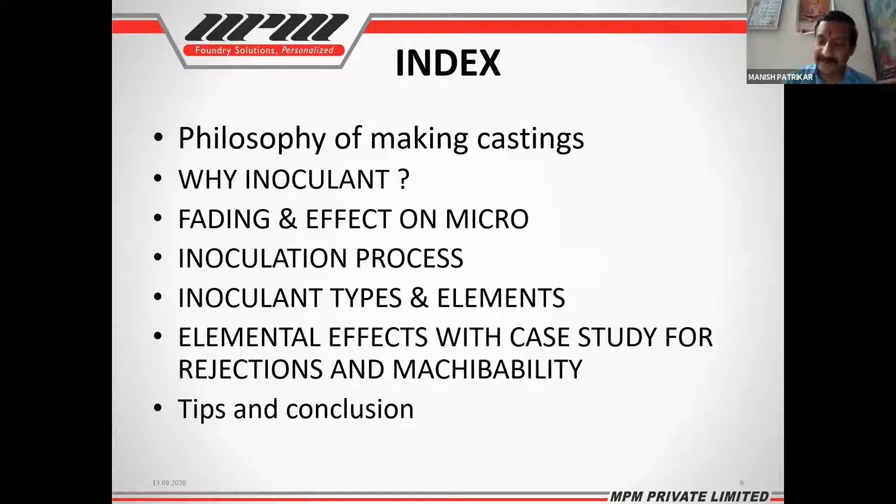Starting with the presentation, as I initiated a move from 2007 about the zero rejection concept in foundry, I would like to say a few words with a few slides on zero rejection again, because that's the philosophy of making castings. Then I will move to the core topic. I will not take more than 10 minutes - I will be 100% within the time limit.

So the question is, when do you have zero rejection in foundry? Sandeep, the answer is with you. When all the things are as per your specification, or whatever process you have defined, if you follow it, you will be almost near to zero rejection. Fantastic answer - again a very good technical answer, and again not the simple one. The best answer for this is: when the foundry is closed, you have zero rejection.

So we will go to the philosophy of making casting. What is the philosophy? Whenever, if you believe, 98% of casting defects occur when the metal is molten. We all know when metal is molten, then only defects occur.

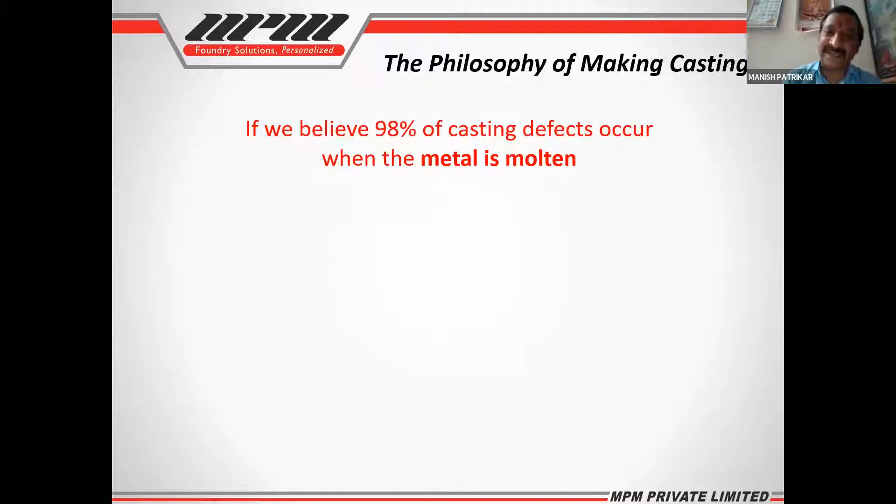So in an ideal world of a perfect mold and perfect melting, if our pouring time is zero, if ingate velocity is zero, if solidification time is zero, then there is no time for defects. This is the philosophy of making casting, which is what Sandeep was trying to say in normal words. I have said this from the metallurgical point of view in technical terms. You can imagine if pouring time is zero, ingate velocity is zero, solidification time is zero, there is no time for defects.

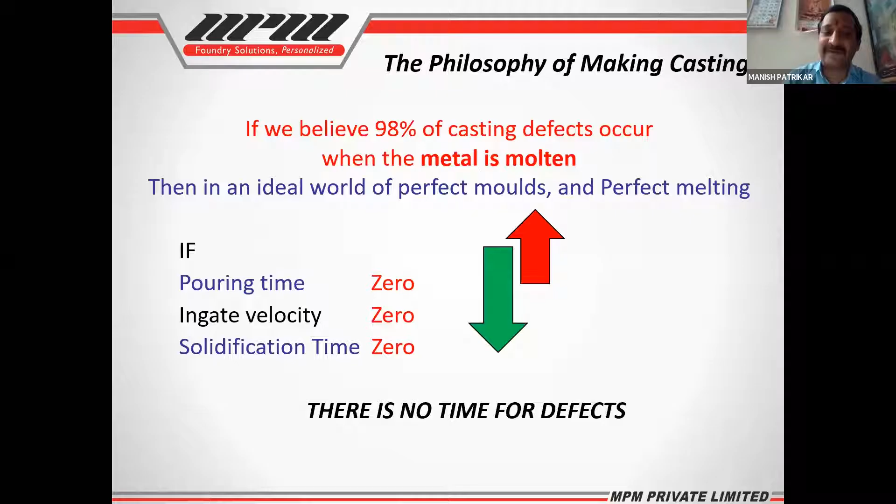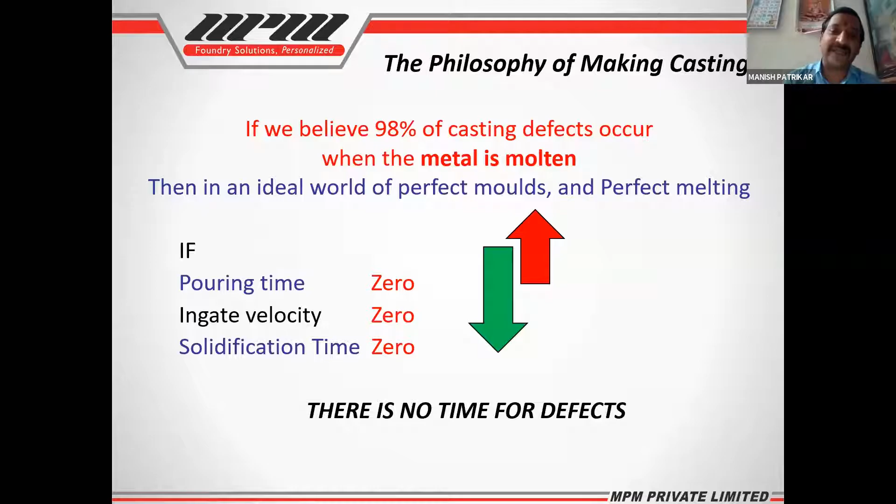So what does that mean? It means it is giving you a direction. Whenever you are going in the green direction, whenever your pouring time is less, whenever your ingate velocity is less, whenever your solidification time is less, that gives you no time for defects. It means it will give you fewer defects. If you move opposite to that direction, shown here by the red arrow, that is where you will move towards defects.

So this is the philosophy of making casting, right? In short, whenever we are going towards zero defects, if you use less of everything, like I said in the previous slide, you are moving towards a zero defect concept. This is a philosophy of making casting which I have been promoting right from 2007. That's why I shared these two minutes with this slide.

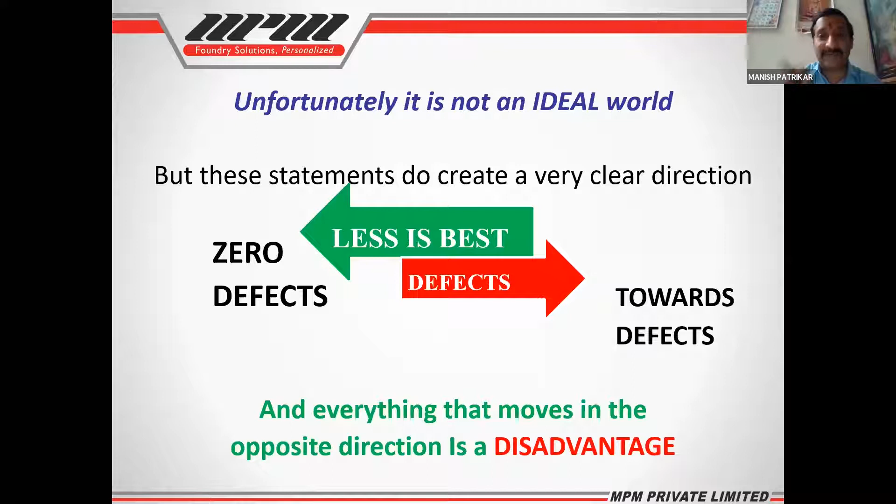Now we are going further into the detailed topic. Coming to inoculation, I urge all foundrymen, whenever they look at inoculation or inoculant as something which will do magic, please remove this from your mind. Using special inoculants like cerium, bismuth, strontium, or zirconium is not the answer to all your issues. It is the last solution.

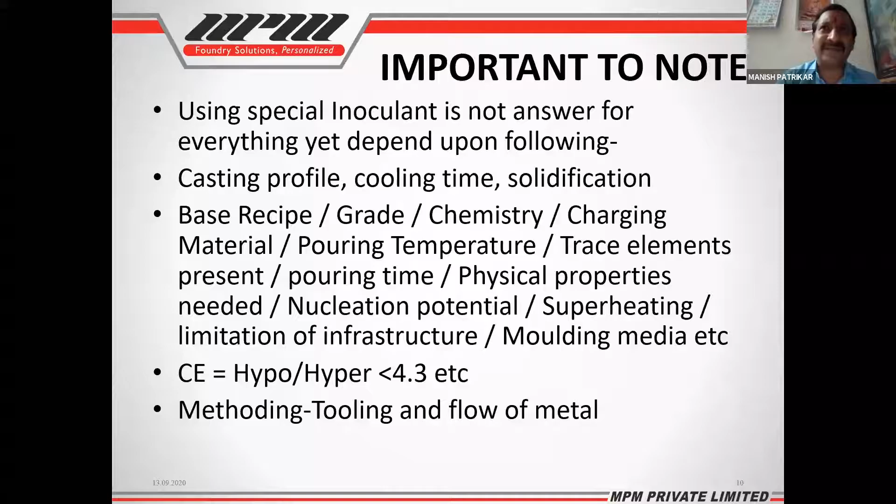If you have a macro shrinkage, believe me, 99% of the time inoculant will not work. If you have a micro shrinkage, very very minute, due to fading or some similar issue, then yes, that's an answer. So what exactly is inoculant?

If you see the first, second, and third images, these are wedge chill tests. In the first, there is no inoculation. The second is with 0.25% ferrosilicon, the third with 0.125% strontium. So these show the elemental effect. I have not used anybody's product here because this is a technical forum, so I am trying to show the elemental effect.

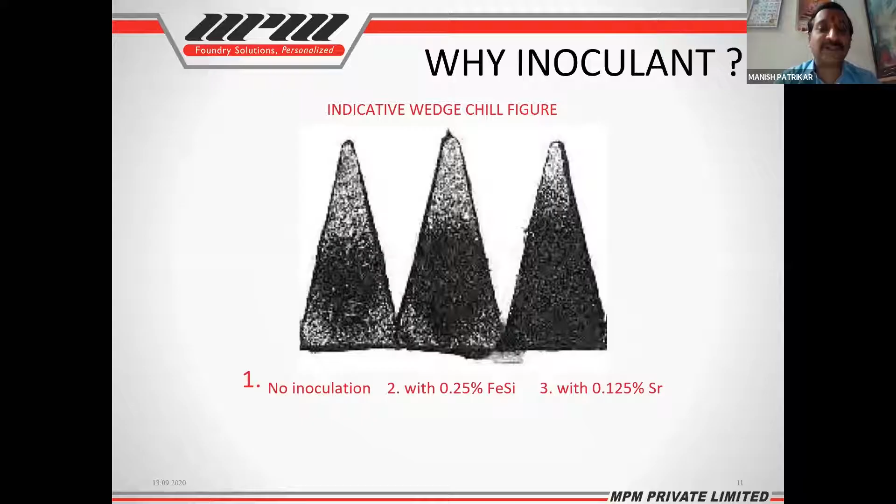In the first slide, you always have a higher chilling tendency. In the second, because of using ferrosilicon, you have a lower chilling tendency. And in the third chill, you can see because of using the strontium-based inoculant, you have a much lower chilling tendency.

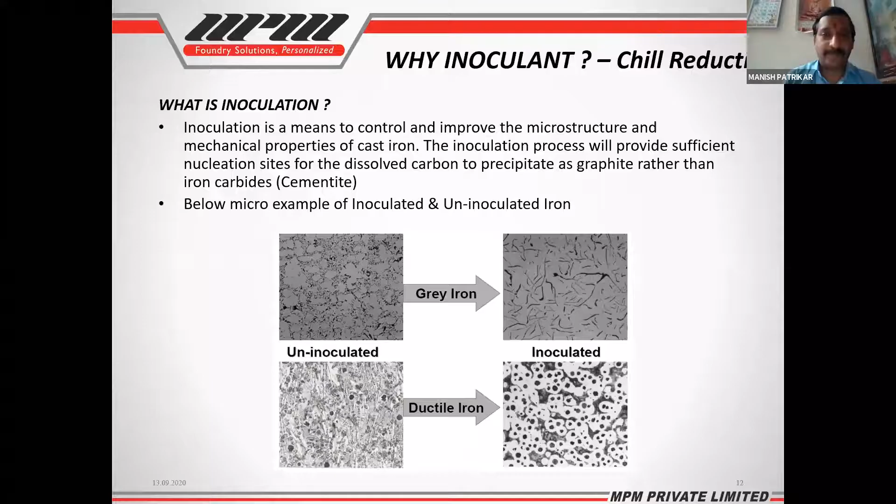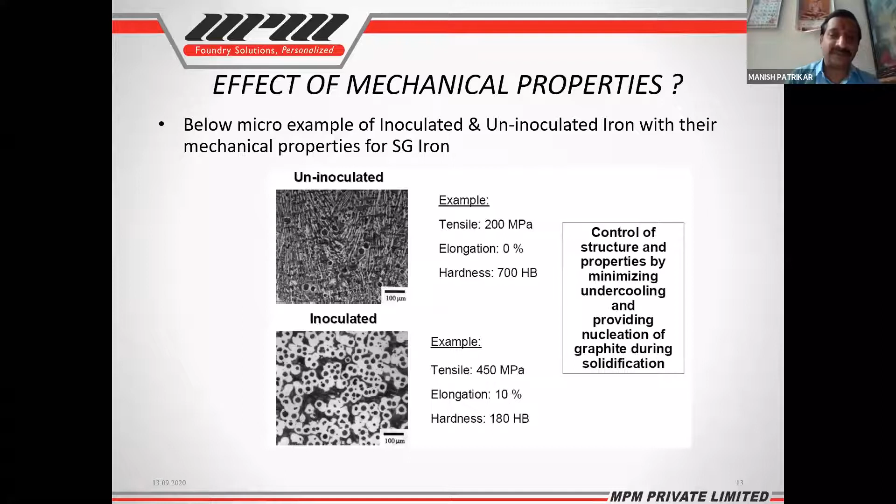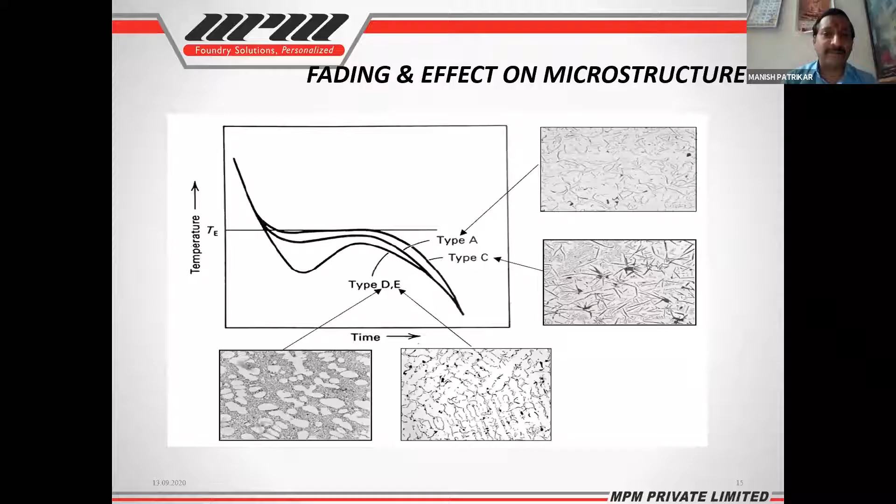Then this is a fading effect on the microstructure. What exactly is type A, type C, type D, and E? Mr. Gaikwad has already covered this in his earlier slides, so I will not spend much time on these. This is what he has already shared.

First is ladle transfer, second is ladle pouring, and third is mold stream inoculation. This is a normal practice. I would suggest everyone establish their own numbers, but whenever somebody mentions ladle grade inoculants, the

ladle grade inoculants range from 0.5 to 2mm, 1 to 3mm, 2 to 6mm. So there are always questions people ask, what ladle is best? What sizes are best for the ladle? This is in general.

Everybody has to set their own parameters, because no foundry is similar, even if producing identical components. For ladles greater than 50 kg and less than 300 kg, we can use 1 to 3mm and 0.5 to 2mm inoculants. For ladles greater than 300 kg, 2 to 6mm, and for greater than 1 ton, 2 ton, 4 to 8, 8 to 12mm sizes are recommended.

For mold stream inoculation, 0.2 to 0.7 is advisable, and for in-mold inoculation there are inserts available for bigger castings. But usually for pouring, where pouring machines and auto pour systems are used, 0.2 to 0.7mm is the normal recommended size.

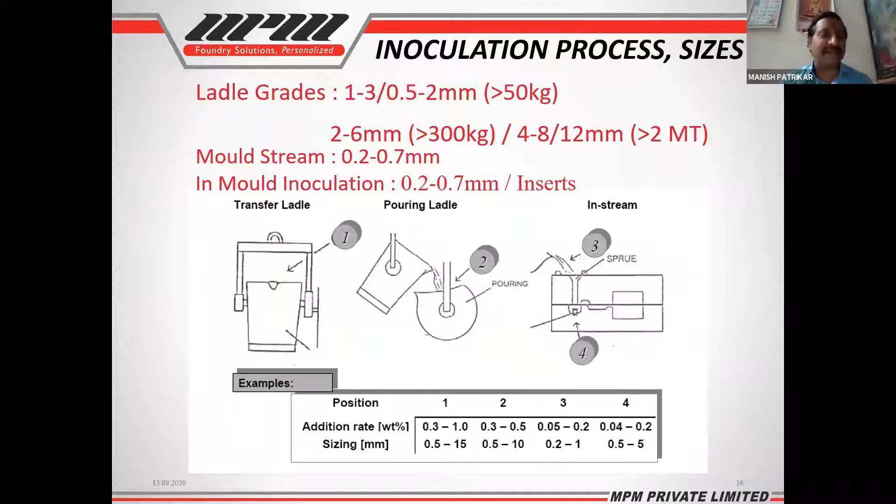What are the inoculant types and elements? There are two types of inoculants - I'm telling you from the manufacturing perspective, not elemental. One is cast and the other is mixed. However, nowadays mixed inoculant is outdated.

So most inoculants that exist today are cast inoculants, and they are classified by potency. There are low potent inoculant, medium potent inoculant, and high potent inoculant. The potency is actually the intensity of the element.

Low potent is ferrosilicon with calcium and aluminum - actually all inoculants have ferrosilicon with calcium and aluminum. Medium potent is barium-based inoculant. High potent is strontium, zirconium, cerium, bismuth, lanthanum, antimony, because these are very specific and very strong inoculants where you need a specific purpose to use them. Otherwise, even an extra dose of these inoculants will give you a defect.

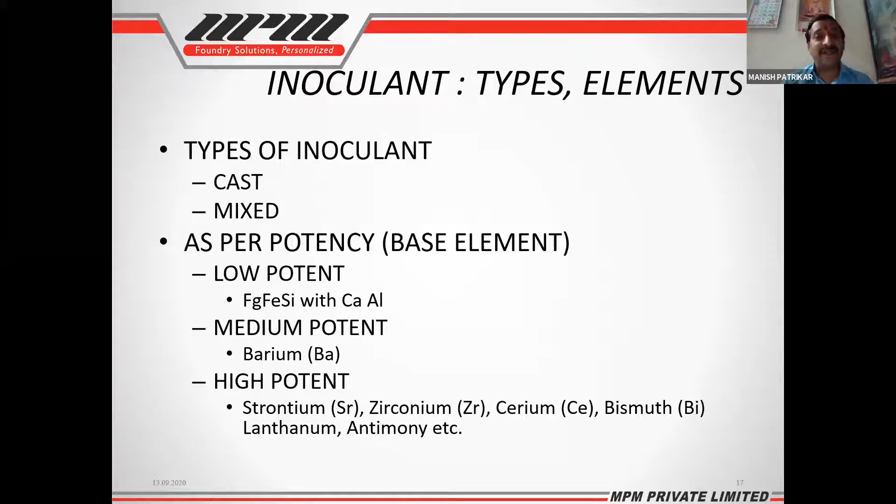So these are something which we are trying to conclude the effects of the element. If you can see the fifth number, barium-containing FeSi has the highest fading tendency. This is a chart where you can decide what exactly you want for the element and what the effect will be. On the left-hand side you can see nodules per mm square, and on the x-axis you

can see the time after inoculation for the inoculation after pouring. So this fifth number has the maximum time, up to 20 minutes, which is a high barium inoculant. Say for example, if I take barium - so it has an initial, say for example, 7th. So 7th is strontium.

The initial effect will be highest, but it will start fading after the 10th minute. Even for bismuth, if you look - there is no bismuth in this chart, it is in the next slide. So if you see the 2 to 6 minutes, these are the minutes where you will have very high initial graphite precipitation, and then it will start slowly fading. So barium has the highest fading tendency as per the number 5 chart.

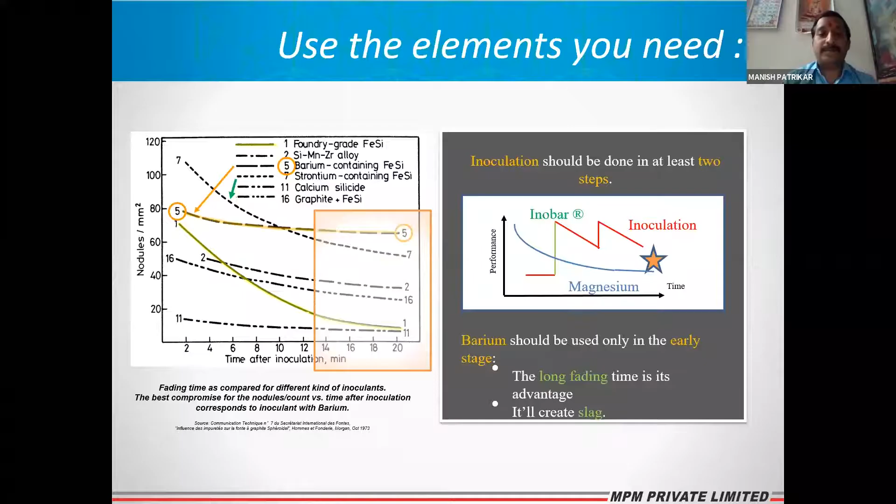So if we see specifically barium, it's a fade resistant inoculant. It is mainly used in gray and ductile iron commonly. It's used at heavy section thickness also with a high pouring time, positive effect on slag formation in ductile iron, effective inoculant for alloy irons such as Ni-resist, especially effective as a preconditioner or as a first step inoculation.

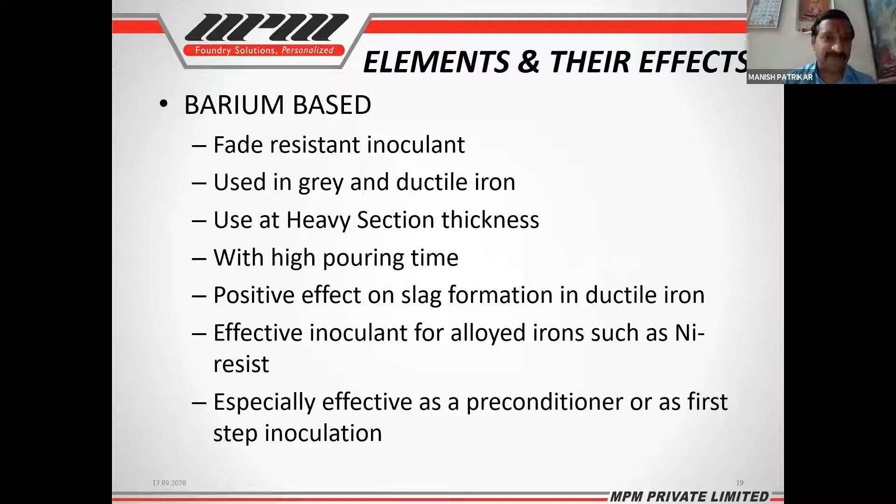So this is the elements and their effects we are starting with. Now I am taking strontium. Generally, it is admitted that strontium inoculants are supposed to be best for gray iron, even though strontium inoculants are also being used for SGI. It's a myth in India that strontium inoculants are only used for gray iron. No, strontium inoculants are also used for SGI.

For your information, most of the foundries producing piston rings, which have only 1 or 2 section thicknesses, are also using strontium based inoculant for SGI. So it is not that strontium is only used for gray iron, it is also effective for SGI.

This gives maximum chill reduction. It promotes less shrinkage than other inoculants. It reduces the chilling tendency, and it also improves the microstructure.

Here is a casting which I am showing. We took a study with this casting where, in the fin region, they were having D-type graphite formation and were using barium based inoculant. But with use of strontium based inoculant, the shrinkage tendency and machinability improved, which also helped improve the machining.

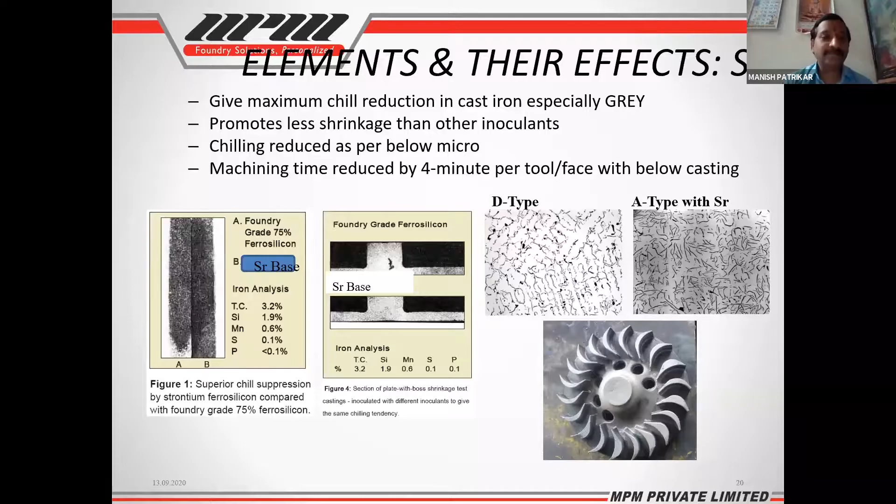Strontium plus zirconium - I'm trying to show this from a case study perspective. This is the RA housing where earlier they had C-type defect in the microstructure, which improved with the help of strontium and zirconium.

This is also a similar defect where they had C-type and open grain structure after machining, as you can see on the left. But while using strontium zirconium inoculant, we were able to eliminate this defect.

Again, I would like to declare here, it is not a ready-made solution. It's not that just by using inoculant, everything gets solved. You also need to work on gating, risering, fading, chemistry, molding media, and solidification. It's not magic that you drop the inoculant and things will go right. No.

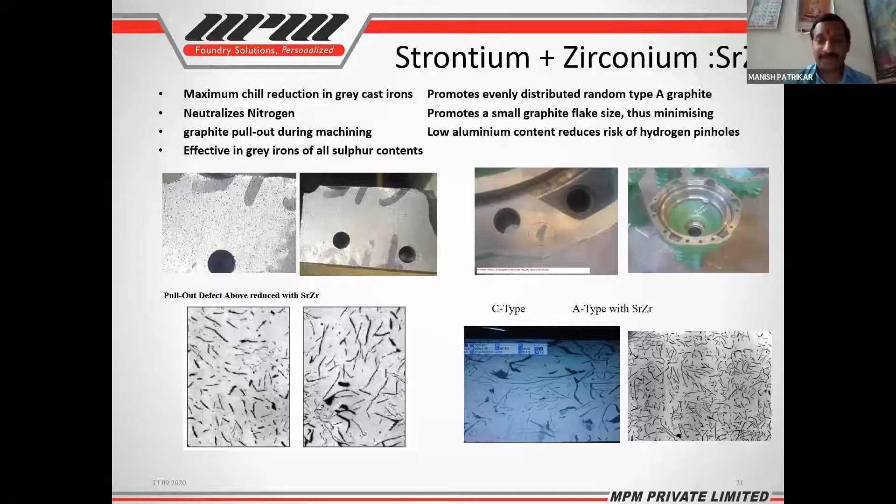Cerium - we are using this as a high potent inoculant. Cerium, like in gray iron, is supposed to have better inoculation. Cerium or RE based inoculants are supposed to be better for SG iron because they are actually used to reduce the shrinkage defect, just like a strontium effect in gray iron. For SG iron, cerium does the same thing and also helps reduce the tramp element.

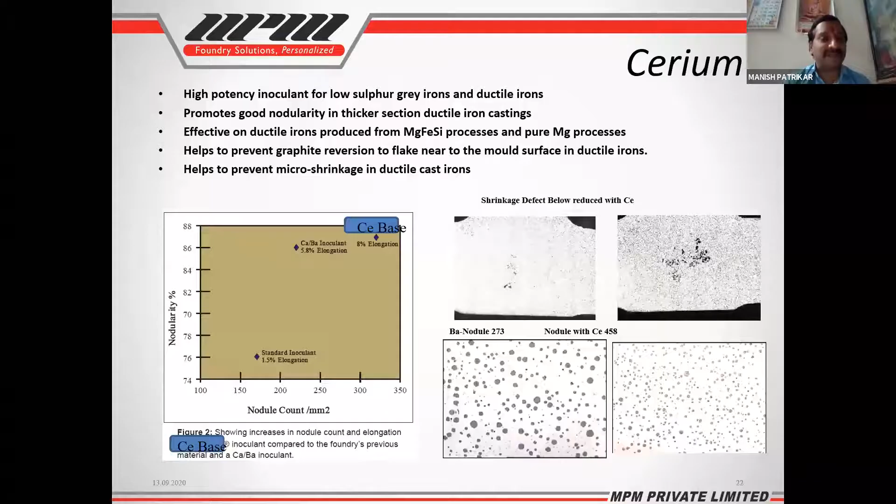Sandeep, I hope I am in time. Yes, you continue, there is no such time limit. You can continue. No, no, but I just wanted to finish in 10 minutes, whatever my time. No problem, given, no problem.

So, bismuth and RE over cerium. There is a myth in India that bismuth inoculants promote an elemental effect and a cumulative effect in the casting as a residual element, which later builds up and gives a defect. No - if you are using direct bismuth as a metal, then there are chances of buildup of bismuth metal or bismuth element in the casting.

But if you are using bismuth in combination with RE, it's like a poison curer, because using direct bismuth is a poison for the metal. But when you use bismuth plus a combination of RE, it acts like a poison curer and gives better effect in terms of all elements.

As you can see on the left hand side, if you use ferrosilicon with cerium base, your initial graphite precipitation - if your nodule count is 100 with cerium - with RE based inoculant, you will get 350, which is almost 3 times, but it has to be used in a proper way.

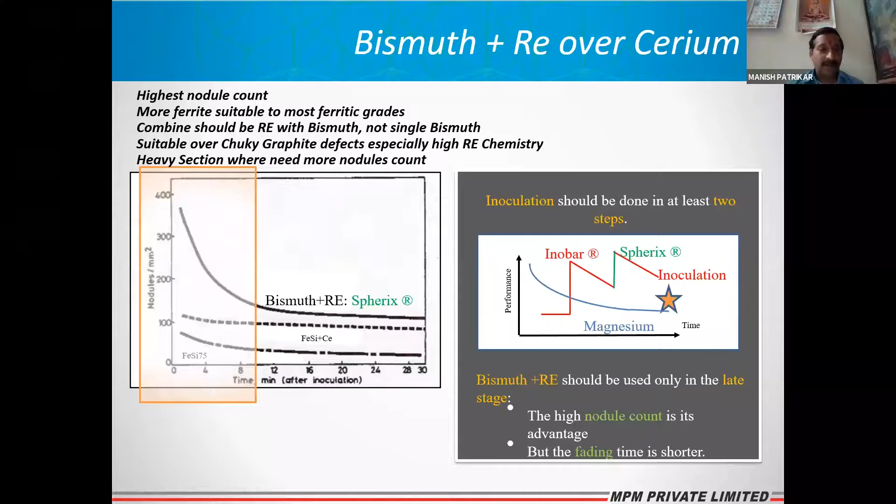Okay, so this is for the elemental effect. What are the ongoing trends? For shrinkage reduction, longer fading FSM. Now the ongoing trends are lanthanum based FESIMG, lanthanum based inoculants, antimony based inoculants. Some foundries are using preconditioner, but it's a question whether they need a preconditioner or not. Earlier, when people were not using pig iron, they were definitely looking for preconditioner because of added advantage, but it has to be evaluated and re-evaluated whether we really need a preconditioner or not.

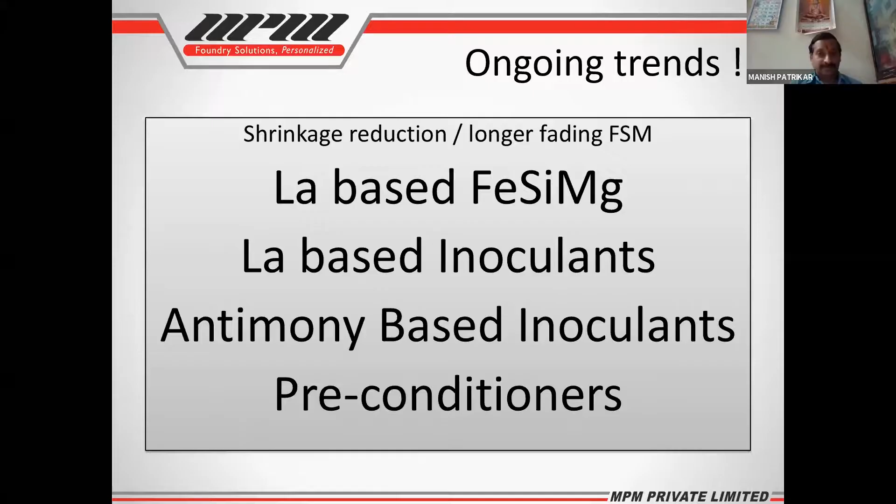So this is the topic for the inoculant discussion. I would like to focus on what I'm trying to say before you come to a conclusion: what is the defect, what is the effect, and what needs to be done?

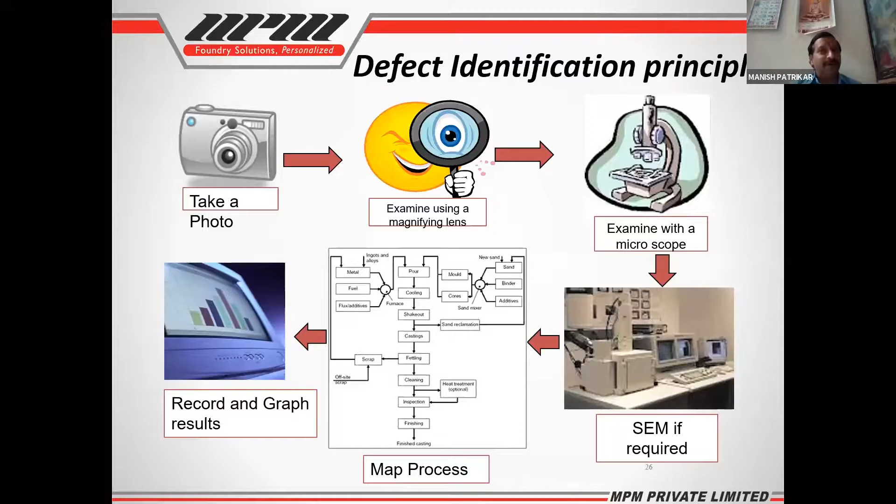These are the actual processes you should follow before reporting any defects, either in the group or even solving them in a foundry. Benchmark your defects with spectro softwares or any other benchmark available to you.

So, in conclusion, what type of defects are possible to be cured by inoculants? Again, if you are already 95% done with your chemistry, microstructure, methoding and gating, then these are to be considered.

Carbide reduction can be reduced by inoculants, D-type or undercooling, nitrogen fissures, micro shrinkage, microporosity, and reversion defect.

The reversion defect is the defect on the mold, on the casting wall, on the side of the mold. If you have SG iron producing and flakes coming in the SG iron on the wall of the casting facing the mold, that is called the reversion defect. It is possible to reduce by using cerium-based inoculants.

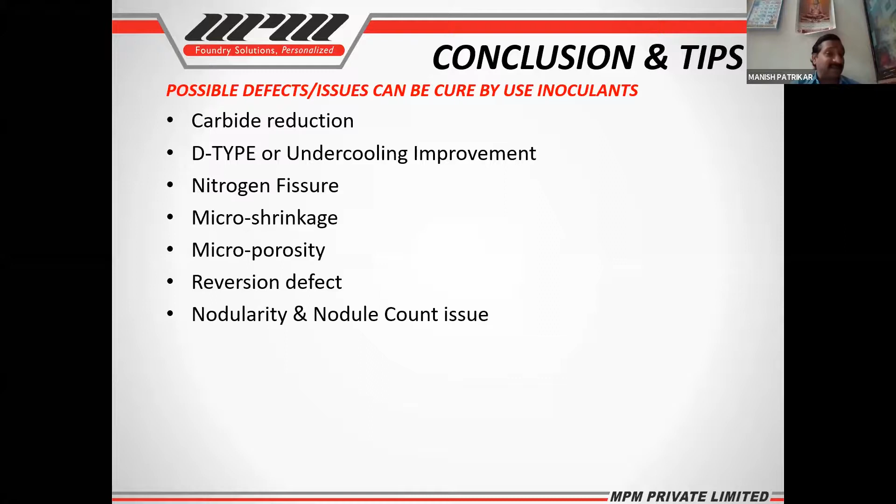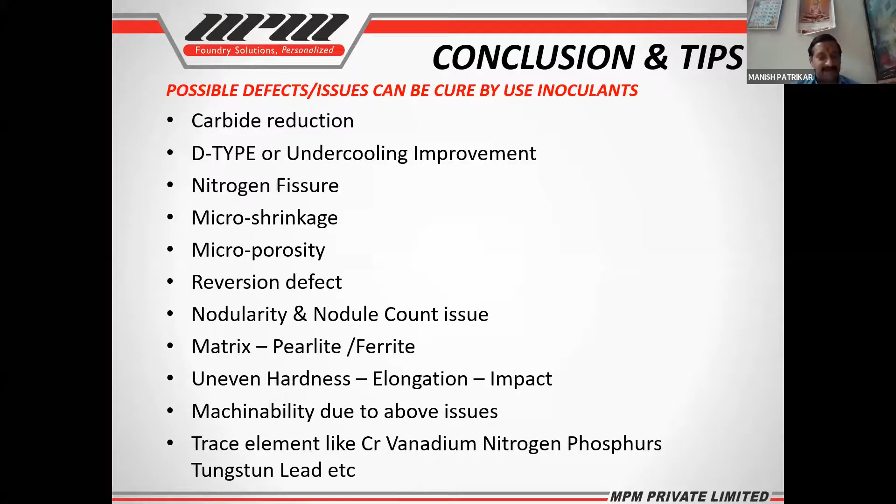Nodularity and nodule count issues, as I said, for the bismuth—if you want a booster, you can improve with bismuth RE-based inoculant. Matrix pearlite ferrite issues, uneven hardness, elongation, machinability can be improved. Trace elements like vanadium, nitrogen, phosphorus, tungsten, lead can be reduced to some extent, not higher, but to some extent.

Follow this 'less is best' philosophy. Your base has to be good. Man, machine, material, and method has to be the base for making an inoculation decision.

Believe your process, inspect, and then look into raw materials. Make your foundry process system driven. Good maintenance, raw material selection, and careful metal handling are the three key criteria in metal defect control.

A high potent inoculant will save machining cost—don't only look into the price. I am again urging everyone, whenever you are looking into any special material, it's not only inoculant. Whenever you look for any special material, don't ask the first question as price.

Ask the supplier or your partner what different types of advantage it is going to give if you are paying a higher price. This should be the way of asking the question, not 'how much does it cost, how much will you give.'

So avoid superheating and holding of the metal. Be receptive, open and transparent, because we have seen in most foundries, whenever you ask any question, the response is, 'sir, this is the problem, I think there is a process issue.'

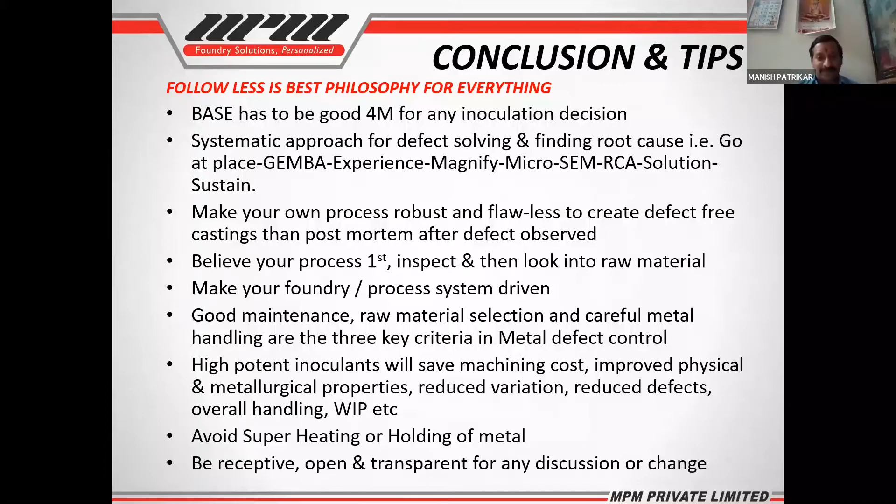You have to do it right whenever you come to know. So be transparent, discuss for a change.